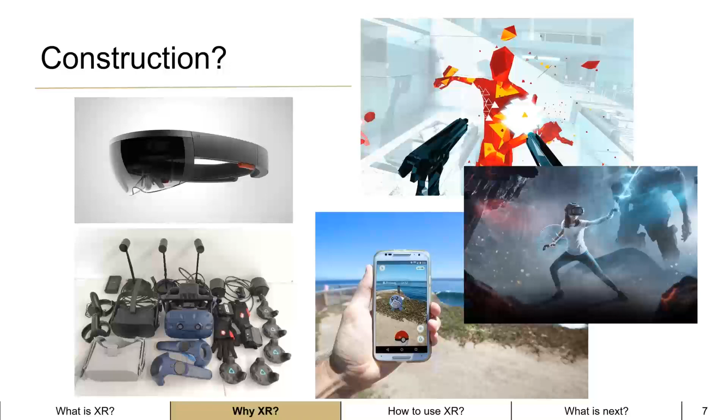So why is it related to construction? Why should construction professionals pay attention to this technology? Here are some use cases I summarized. So let me share a video with you.

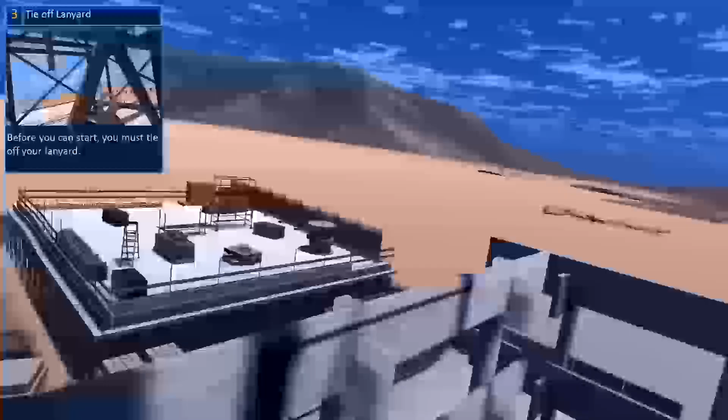We've equipped you with your harness. This video demonstrates different types of... you should find where to clip your lanyard. Use the looking trigger on your controller. Video playing: worker is trying to connect himself with fall protection.

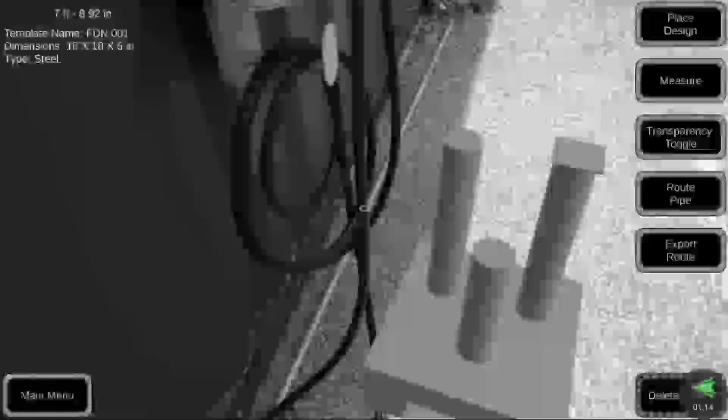So you can use virtual reality for training. This is an app I developed myself. This is a future construction site, thank you Todd for the model and access. So here you can see I use an iPad to visualize what is going to be built, and that app can be used for on-site visualization, site planning, and different types of applications.

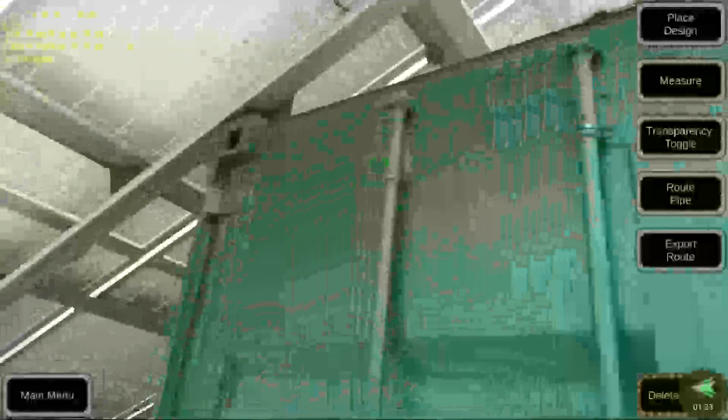This is another video, mixed reality. You can see the application understand the surface of the real world, and you can use it for on-site pipe routing. This is another good tool for professionals on the construction site. They can recognize the surfaces and do intuitive pipe routing. This is another app I developed myself.

You can see this is a building in UT Austin. So using this app, you can visualize from your iPad to see the piping system, what is hidden above the ceiling, and then understand, to support your maintenance use cases.

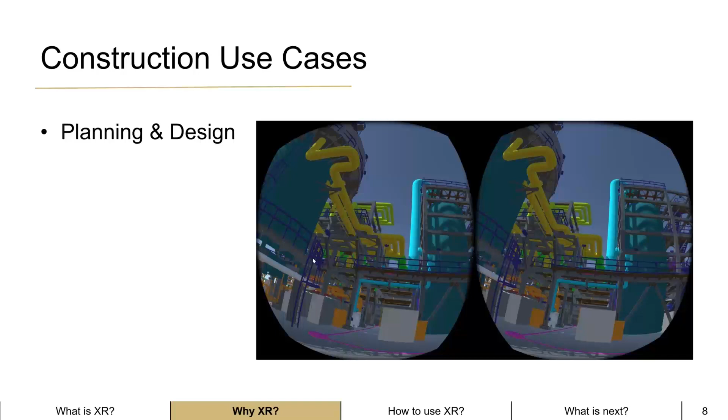Let me stop sharing that and bring back my slide. So at different stages of a construction project, you get different use cases for these technologies. I showed you training situations that can happen way before a project. During planning and design, you can use virtual reality to realistically visualize what has not been built, to review this model.

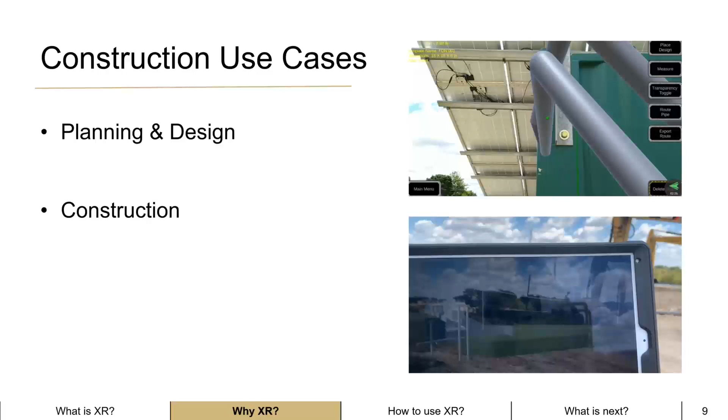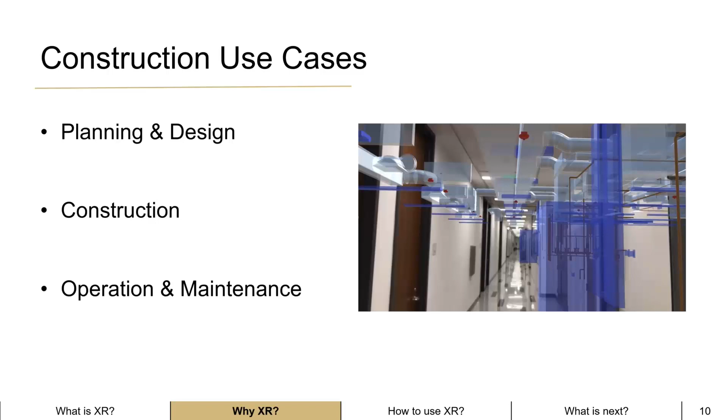During construction, you have site planning, you have on-site pipe routing. After construction, during operation and maintenance, you can use it to support operations, and you can use it to identify items, the exact location, and therefore help your maintenance.

Key characteristics I see from these existing VR, AR, MR technologies: these technologies deliver information in innovative ways that our industry has never experienced. First, you can visualize the model in real scale. It provides you intuitive and realistic understanding about either the model that is going to be constructed, or hidden things that you cannot see after construction. It can help us simulate low frequency situations in a hazard-free environment.

Let's say construction safety training. Some researchers use it to simulate earthquakes, which is definitely a low frequency situation. But that kind of simulation helps people understand how to do evacuation, helps designers design evacuation signals. Also, you can access it wherever you want, on-site, off-site, in your home office, during a vacation if you want.

All these types of characteristics provide our industry innovative ways to understand and to communicate, and that can potentially enhance the performance in many use cases. Okay, I know I've said a lot of 'potentially,' 'should,' 'might,' and I know that is not enough for industry, for companies to invest real money in these technologies and just put their bet on potential.

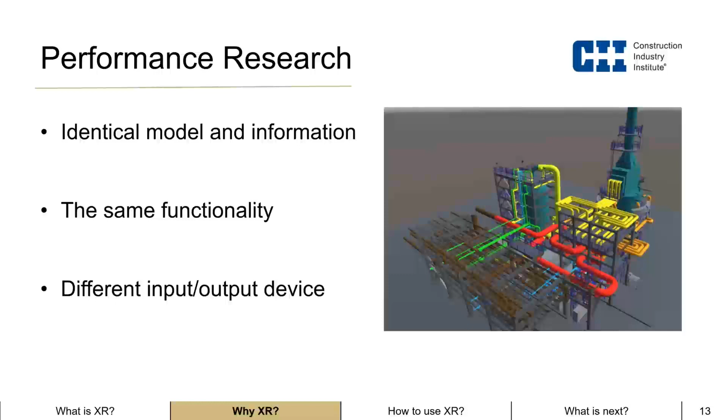The two test beds use the same model and have the same function. The only difference is that one test bed is in VR, as you can see here, and the other test bed uses a computer monitor.

We invited 24 experts and 24 novices. We randomly assigned them into either the VR group or the computer monitor group, and we asked them to perform 4 design review tasks to see if the VR group showed any improvement at all.

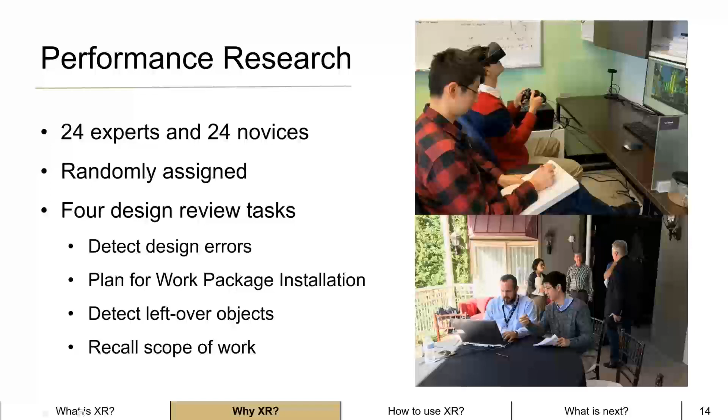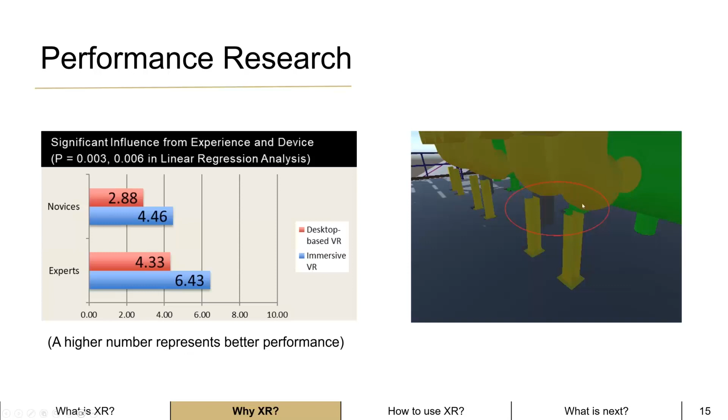In the first task, we asked them to identify design errors in the model. We added 10 design errors manually to the model. For example, after pipe rerouting, the original support is not high enough. This one, you're missing a support here. After rerouting, you have redundancies here.

So we asked the users to use the two different technologies, with the same functions, to identify these errors. The result is that both novices and experts performed significantly better in VR than in the computer test bed.

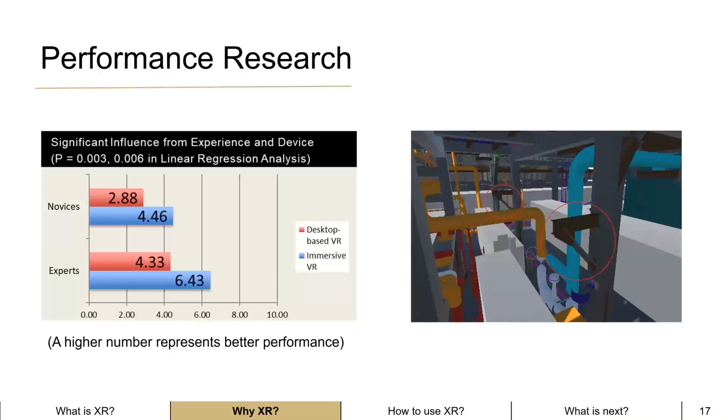For the second use case, we used the advanced work packaging developed by CII to separate this model into 9 work packages. We wanted to test the user's understanding of the spatial relationships between these packages, so we asked them to come up with construction schedules: can they be done at the same time? Who should be first? Questions like that.

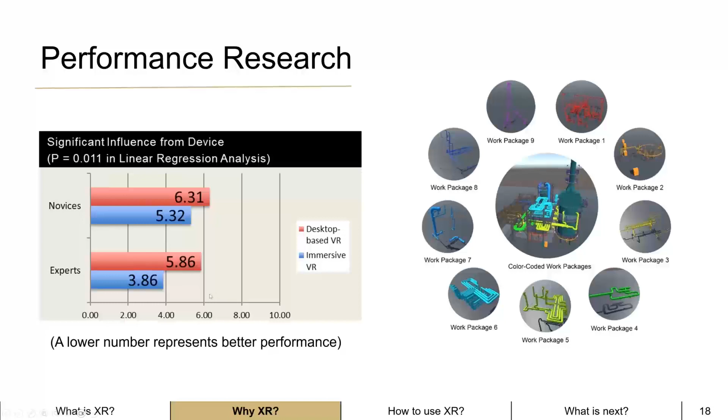The result shows that both novices and experts committed significantly fewer errors in their schedule, which we believe indicates a better understanding of spatial relationships among these work packages. We asked them to do other tasks.

We asked them to identify leftover objects. Everybody did the same. We also asked them to memorize the scope of work within the model. Well, no significant difference. We didn't find any significant influence, and honestly, desktop users performed a little bit better than VR users.

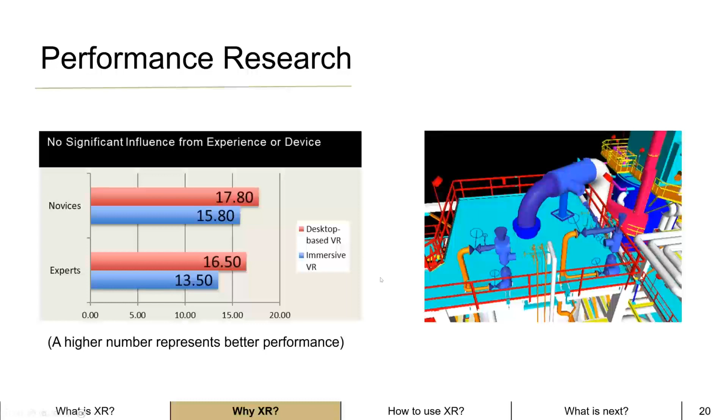Key findings from this project: first, we quantified the benefits in a construction design review scenario. The benefits you can expect range from 18% to 59% improvement in user performance.

But we also see that this is like a great hammer. It has perfectly fitting nails, but it is not a hammer that fits all nails, which means these technologies are not a solution for everything. They are only useful for specific use cases.

Other researchers in academia use similar ways to identify use cases appropriate for VR and AR technologies, including design review and coordination, different types of training and behavioral simulation, mechanical, electrical, and plumbing, quality assurance and quality control. Also, during operation, different maintenance use cases, and site management is also a great scenario for VR and AR technologies.

This finding is published. I published it with my PhD supervisor in 2021, in the Journal of Construction Engineering and Management. I've put the link here if you're interested—feel free to refer to that paper.

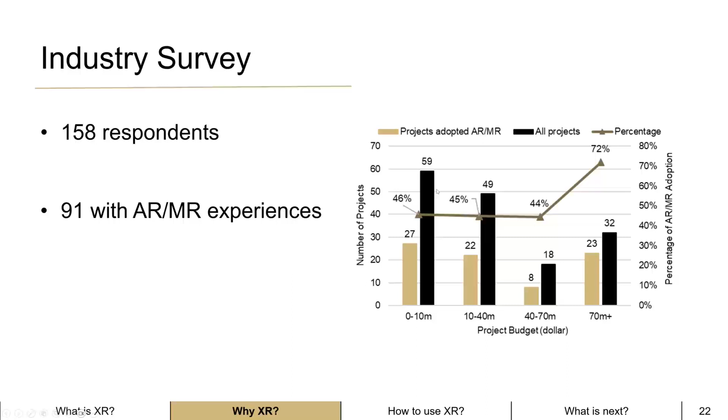We asked VR, AR, MR users where they see the benefit of this technology when they actually implement it. A very interesting result is that the top ranking benefit is business innovation.

That reminds me of the beginning of BIM implementation, when we referred to some BIM applications as 'Hollywood BIM'—meaning it's just a 3D model used to either demonstrate the design or communicate with the owner. At least it's a way for designers and contractors to show muscle, saying 'we are very good at technology,' but instead they're not using it in any engineering way. So the result really reminds me of that Hollywood BIM, meaning AR/MR technologies, although technologically more mature, their implementation in our industry is still at a very early stage, used as a communication and demonstration tool.

But I also want to mention that we still see quality improvements, improved decision making and planning. A lot of these things ranked pretty high, which means even in the early stage of this technology, we are already reaping benefits from implementing them.

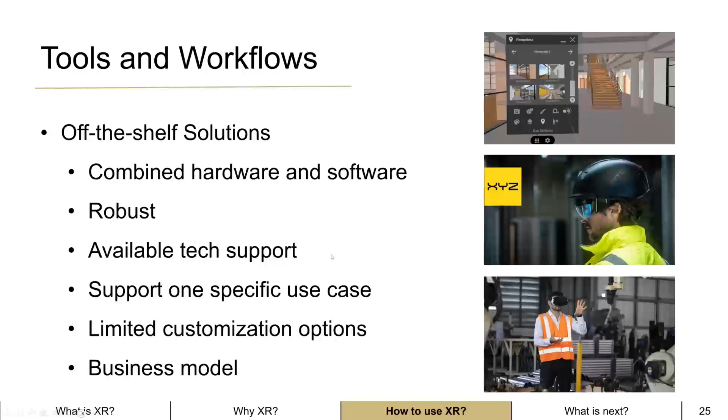So off-the-shelf solutions, that is one route. The other route - this is what I developed with CII 2019 - is to build an in-house development team. The team should understand building information models. They should understand basically how to develop, how to transfer the model, how to handle the data, and how to visualize it in either VR, AR, or MR.

With this team, you can develop your own app. I want to refer to the virtual reality implementation guide that our CII team helped put together. Basically, it tells you the fundamental process of how, starting with a building information model, you end up with a VR-ready model. This implementation guide covers all the data transfer and data optimization process. I put the link here if you're interested in that.

Data exchange - if you decide to have an in-house team to help build these applications, data exchange is one of the most challenging things for developing these applications. I want to recommend software-specific solutions. Like if you decide you're going to use Autodesk and Unity, there is a tool called Unity Reflect. It kind of helps you transfer the model and data. You can always use other different types of data formats - FBX is the one I use very frequently. You can use these different data types to do software-specific data transfer.

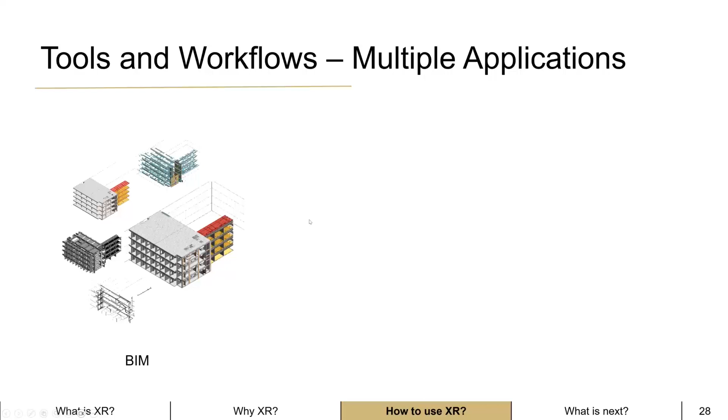I want to present one of my PhD works, which helps us build multiple applications using the same model. The current issue about developing an app from scratch is that, let's say you start with a BIM and you want to do a VR walkthrough. So you do model transfer for VR walkthrough to computer graphics software, you process the model, and then you develop it for VR.

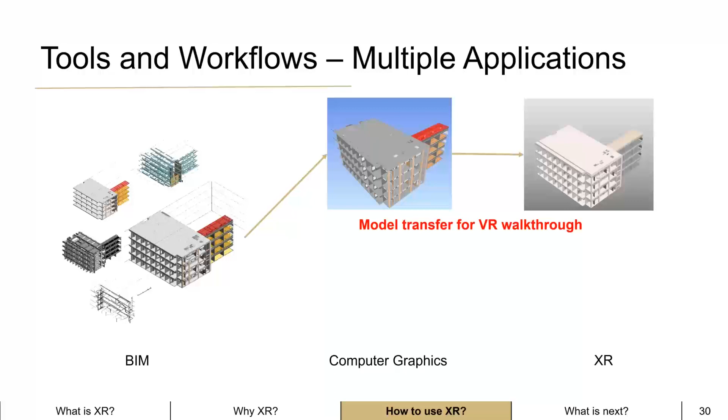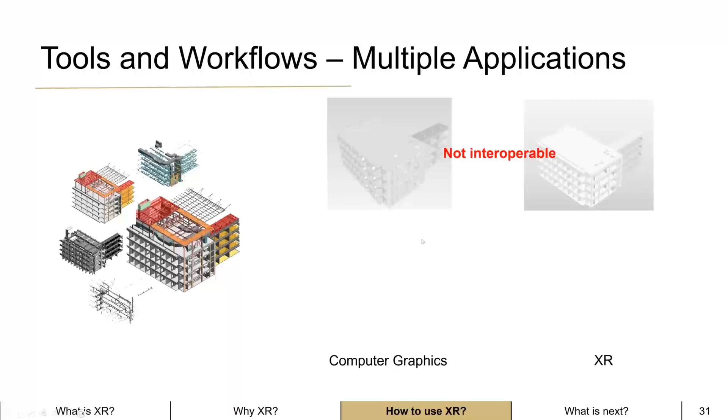However, months later, you get the design updated and you want to use augmented reality to do site planning. So what will happen? Because your original model is not interoperable, you're going to redo this all over again, doing model transfer for AR site planning.

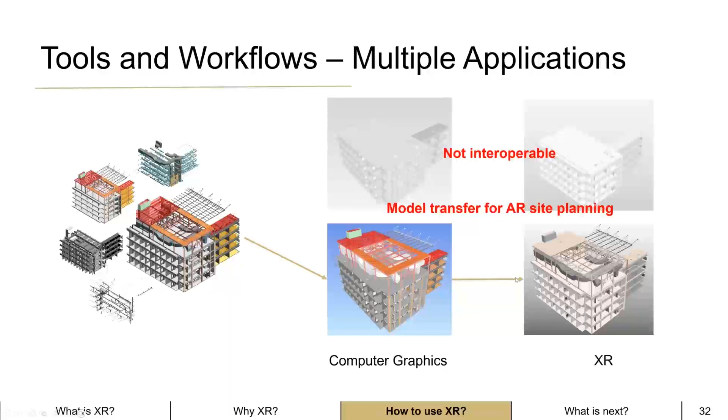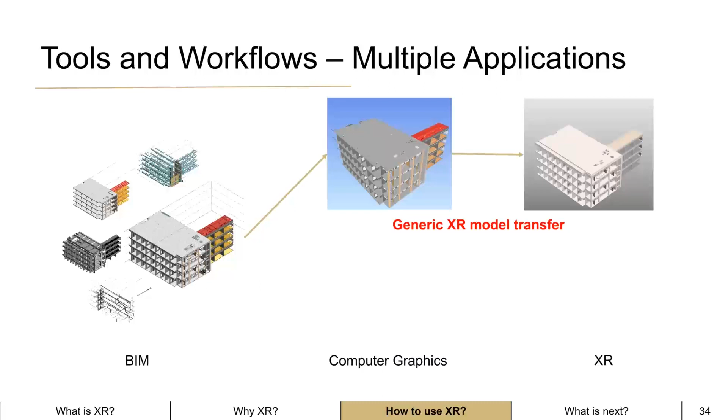What I'm proposing here is that when you have a BIM, you do a more generic XR model transfer, meaning this model includes all the information you need for different types of VR, AR, MR uses, and the information is directly attached to the model. After you get an update on the model, or want another piece of app, you only process the updated part and combine it with the original model. Then you get the updated model with a new application.

So I published how to complete this workflow in Automation in Construction. If you're interested in that, feel free to refer to this paper.

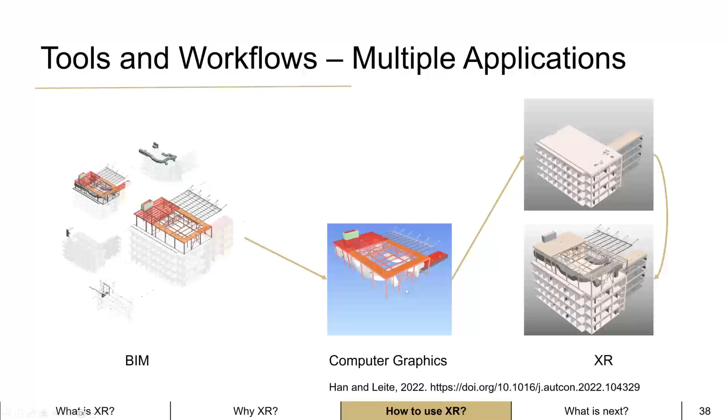Finally, I want to talk about future directions about using, developing, and researching VR, AR, MR technologies.

The first part is always data interoperability. Currently, there are different software system companies working together to create a pipeline of two-way data exchange, but there are protocols I introduced. IFC is a good one. I like IFC, but it's kind of an ongoing process where you always get missing information. So it's a good tool, it's not perfect.

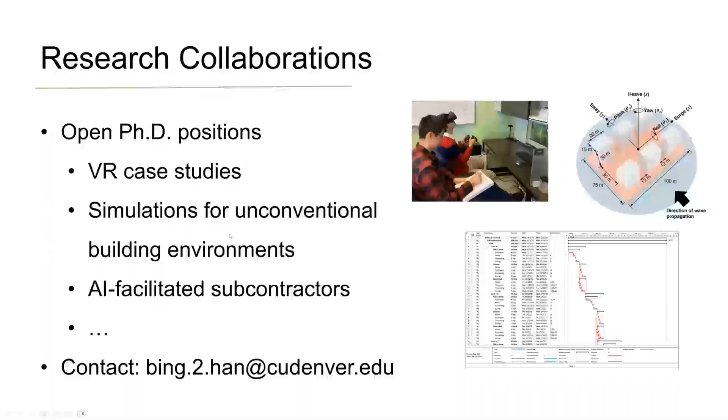Thank you, we do indeed have questions. So the first one is, what is the difference between the app you've developed and the Trimble Connect app? Well, that's a very good question.

Trimble Connect app helps you automate some processes, so you don't need to manually do all the model transfer. They help you automate part of it. But my understanding of this type of automation is that it also comes with limitations on customization. You only rely on the functions that they are going to provide, and you only rely on the equipment they tested. Well, the good side is they tested for you.

You don't need to experience the time-consuming, sometimes frustrating developing and debugging process. But I think the more important decision-making point is whether the functions they are providing match with what you want to do. I hope that answers the question.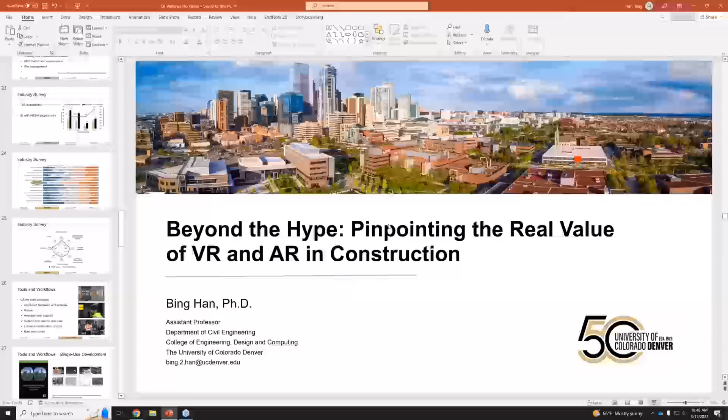Meanwhile, we have a very long question. How can we meld the technological skill set for development of XR BIM with the experience in actual construction? We've already seen within the PMIS application industry that divergence between programmers and users has made available offerings less than useful out of the box, which frustrates users hit with higher than anticipated costs to customize the app. Is this something that can be integrated into the engineering curriculum?

That's a very interesting question - can we integrate it into engineering curriculum? The answer is yes. At CU Denver we've started working on integrating VR AR development into an advanced BIM class. We're still working on it, but I'd say BIM is the foundation of all this. You want to either visualize or superimpose a virtual environment, and that environment should, the majority of the time, come from building information models. So we are having those efforts here, and I believe at UT Austin we don't have a dedicated engineering course on that, but I learned that from the School of Information.

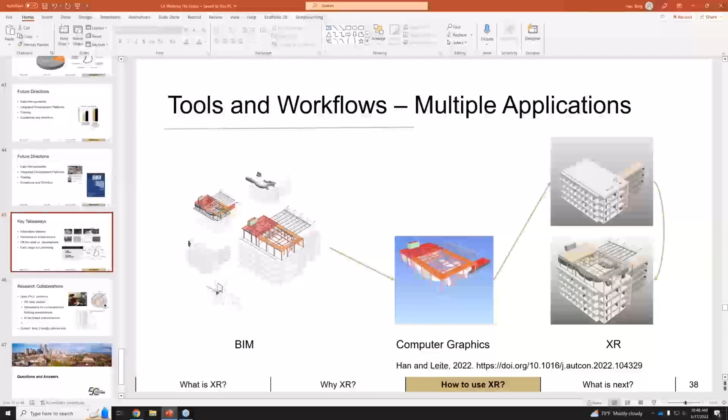Another thing I want to add is that with self-development, sometimes what you develop doesn't match what you want, or doesn't perform as well as the company wants. Still, one easy solution is to purchase whatever is already there. Second, the majority of success depends on the ability of the development team - that's why I mentioned the training part. My personal understanding is you cannot just hand this to computer science and say develop this to me. Most of the time it will fail because they don't really know what you want, what is really needed on the construction site.

So if you want to develop this, I really hope it's interdisciplinary work, that at least people - professionals, civil engineering students who understand the situation and what is needed - are part of the development team. I think that is important.

What tools are you using to extract model objects from a larger model? That's another good question. I guess it should come from people who already use the software.

Let me go through this. Here you see my virtual reality model that is only part of a larger gasoline refinery facility. We select this - the model was in Autodesk Navisworks. We select this part just by clicking all the relevant components within this section, because the original model is too big and we cannot efficiently visualize the whole model in a VR environment, so we choose to do it section by section.

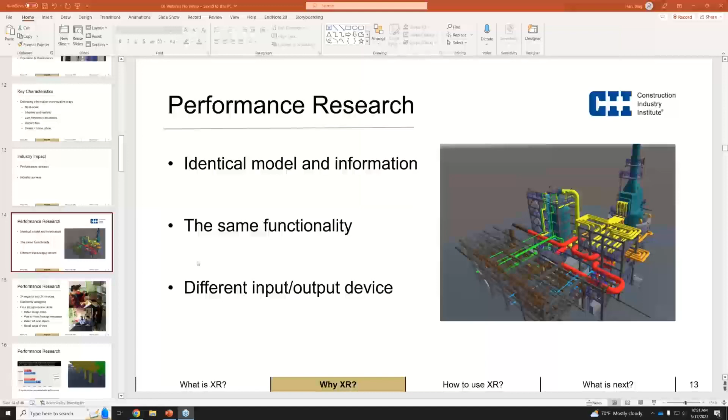I don't quite get the question. Yeah, so I think he's saying that given the development of low cost but complex and graphically rich video game technology, why is this modeling software so expensive?

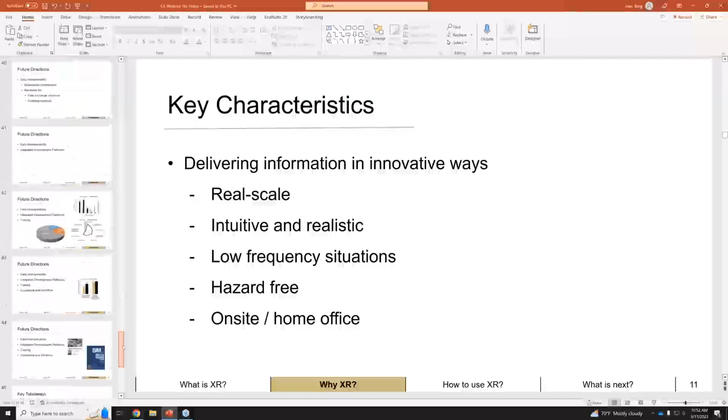So I don't really agree with the beginning low cost part. I think developing realistic experience in VR is not a low cost content creation field, and our survey kind of proved that, because the majority of that goes to developers' salary. I don't think the average salary is as high as gaming development.

If realistic gaming development is a low cost industry, there's no reason we'd be expensive. The audience agrees. I'm getting more comments that video games are very expensive to develop. AAA games are more than 100 million and up to develop. So yes, I think they're agreeing with you.

Another thing is that the first wave of VR/AR was for the gaming industry, so a lot of existing software simulations come from the gaming industry. We use game engines to develop this experience. So I'd say the construction industry type of app is not as easy to develop as games. For gamers, a lot of functions you can directly buy as a prefab that others already did, but in our industry you start from scratch, programming your own stuff. That's maybe another reason why it's more expensive and takes longer to develop.